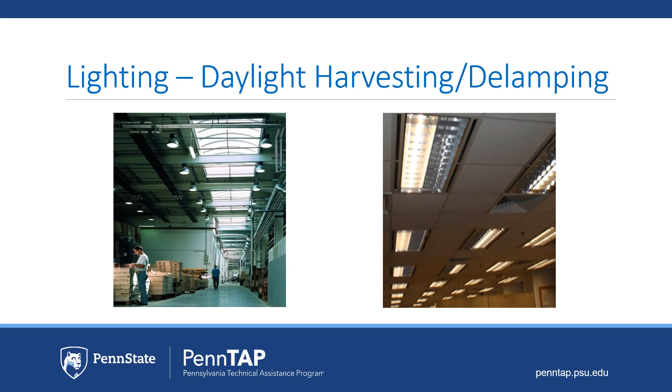While touring your facility to determine where you can delamp, you may also want to note areas where the lights are often left on when no one is in the room. Areas such as these are the perfect places to install occupancy sensors. Occupancy sensors will automatically turn the lights on when someone enters the room and turn them off as they exit.

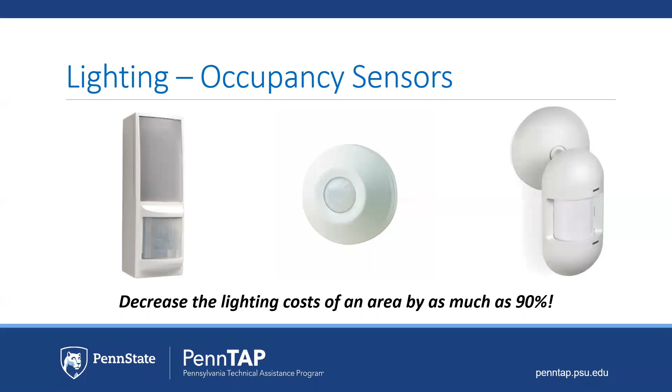And they are most often installed in areas such as your restrooms, your break rooms, storage areas, warehouses, or conference rooms. Once installed, they have been shown to decrease the lighting costs of a space by as much as 90%. Now we're going to discuss upgrading the lighting in your facility to LED bulbs, which can cut your energy bills by as much as 30%.

In addition to this, your maintenance and equipment costs will also decrease because LED bulbs can last up to 50,000 hours. And I want to put this in perspective for you. That means that a bulb that is on 24 hours a day, 365 days a year may last you as long as 5.5 years. That is amazing.

You can upgrade your lighting as a single and complete project or as the bulbs fail. But remember, it will take you much longer to see the savings, up to 5 years longer when you upgrade as the lights blow out. There are grants and rebates available to small manufacturers to help offset the costs of an LED upgrade, and we're going to discuss those later in this presentation. But I want to warn you, in most cases, you must upgrade as a single project to qualify.

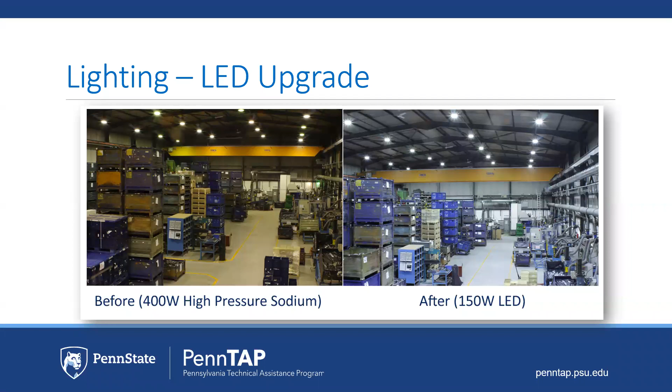And by that, I mean, an area such as shown here, maybe you want to just do that huge production area because that's where all your lights are. It doesn't necessarily need to be every light in your building. It just means that upgrading one bulb at a time as it blows will not qualify you for those rebates or grants.

So Penn TAP recently assisted a client with a lighting upgrade at their plant. While on site, we completed a walkthrough energy assessment where we not only looked at their lighting, but we also looked at their compressed air system and their refrigeration system. We provided the client with a full assessment report that included an analysis of their current systems and the savings based on our recommendations. This plant operates 24 hours per day, 7 days a week. The facility was being illuminated by T8 and T5 fluorescents.

Upgrading these bulbs to LEDs saved the client $7,856 annually in electric costs. The client was also able to use Act 129 rebates from their utility companies to lower the cost of the project by $3,743. And don't worry, we'll discuss those shortly. And here's the kicker. The simple payback period was less than 6 months for this project. In addition, because LED bulbs generate less heat, this client also reduced cooling costs in their chilled storage areas by $531 annually.

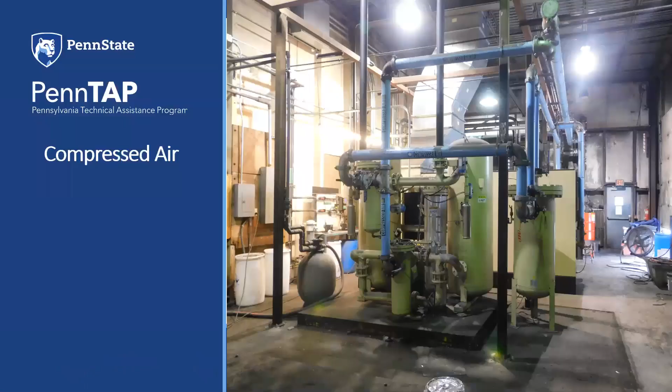Now we're going to discuss compressed air. And compressed air is often one of the most expensive energy-related costs at a facility. Air compressors typically have an overall efficiency of just 10 to 15%, but do not worry. There are several things that can be done to increase the efficiency of your air compressor system. The first thing to do, and I cannot stress this enough, is to stop inappropriately using the compressed air at your site.

Be sure to check idle or abandoned equipment and note if the air supply is shut off when not in use. For example, perhaps you are no longer running a production line due to the impacts of the coronavirus. You may be able to turn the compressed air off for this line until it's back in use.

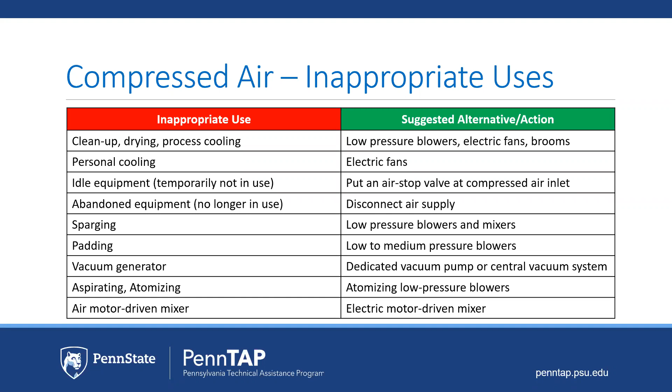Some other tips involve reducing the operating pressure of your compressed air without impacting your production. One way to do this is to reduce your pressure incrementally each week and then let it run for a few days to be sure it is meeting your demand. Or you may be able to reduce your pressure to match the required pressure of your machinery. I want you to remember, it only takes a reduction in pressure of 2 psi to increase the overall efficiency of your system by 1%.

You can also use outside air as intake air to reduce the compressor's workload. This is based on the theory that, in general, the outside air tends to be cooler than the inside air in your compressor room. So in Pennsylvania, the average ambient temperature within a compressor room is approximately 70 degrees Fahrenheit, while the average annual outside temperature is around 50 degrees. The colder outside air is denser and it requires much less energy to compress, which increases the efficiency of the compressor.

Capturing the outside air can be as simple as attaching one end of metal duct piping to an intake port and routing the other end through the wall or ceiling. And it's important to remember, I know today here where I'm sitting, it's about 75 degrees outside right now. Using that outside air can still increase the compressor efficiency, since the outside air is still cooler on a day like today than the air in your compressor room, which can be as high as 120 degrees in the summer.

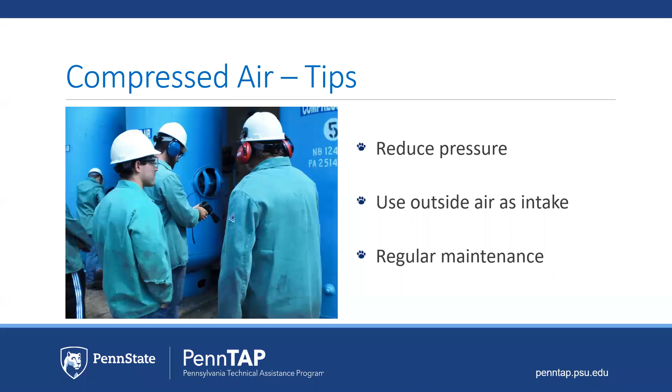Leaks will often occur in areas where the compressed air lines are connected to other lines or equipment, or in areas where there is a lot of movement or vibration. Examples would include the elbow of hard piping, the hose connecting to the hard piping, and the quick connects from the hose to the equipment. And believe it or not, compressed air is also lost where equipment is no longer used, but the air is still being fed to it. This is an especially important consideration during COVID, where you may not be running at full capacity yet.

So how do we detect leaks? This can be done as simply as running your hands along the lines and the equipment to feel for air, or you can purchase a device called an ultrasonic leak detector. They generally range in cost between $300 and $1,200. A leak detector will allow you to quickly find leaks in hard to reach areas or noisy environments. So think of some of those compressed air lines. I've been in facilities where they run along the ceiling. There is no way you're going to be able to feel for a leak with your hand, but that leak detector will let you know where one's present.

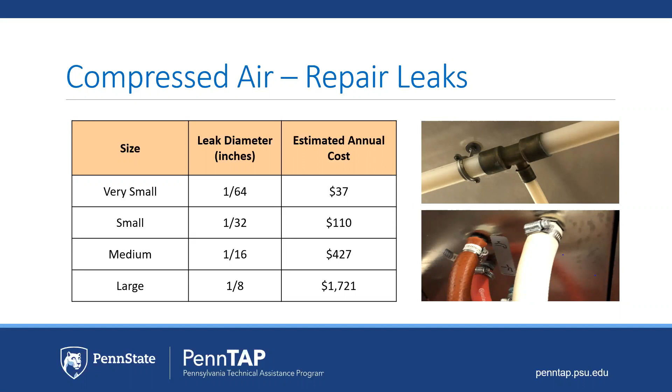Now we're going to look at a case study where we advise the client on fixing those compressed air leaks. We recently visited a food processing plant that was located in central Pennsylvania. They use compressed air to power their production lines. The compressed air is on at this site 18 hours a day, 6 days per week. While on site, we identified 18 leaks within the system.

That was costing them $5,505 total. 11 of those leaks were classified as small. That was costing them $1,208. Now I want you to notice that the 2 large leaks cost this plant almost 3 times as much as the 11 small ones. If this plant had been checking for leaks on a regular basis, they most likely would have been identified and repaired while they were small.

Overall, this plant is expected to save $5,505 annually now that these leaks have been repaired. There are rebates that will help you to lower the cost of the leaks, and we're again going to discuss those shortly.

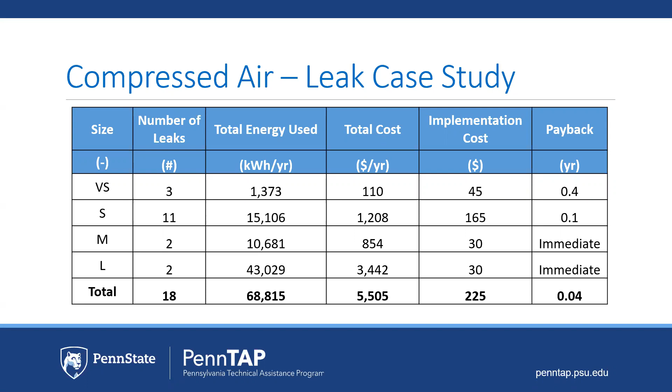Next, we're going to talk about your boilers, and there are several ways to increase your boiler's efficiency, which will decrease your fuel consumption and costs. Once again, the key to boiler efficiency is proper maintenance. Have the boiler serviced and tuned up on an annual basis. Tuning up that boiler can increase the combustion efficiency and decrease your fuel bills by as much as 5%.

Clean the tubes regularly and be sure to check for broken baffles. The tubes in the boiler pictured here became clogged with mineral deposits and caused some of those tubes to break. This may have been avoided with proper maintenance. Consider installing a stack thermometer and monitor the temperature on that stack thermometer daily. If you begin to see the temperatures rising, this is a good indication that your boiler may need to be cleaned or even serviced.

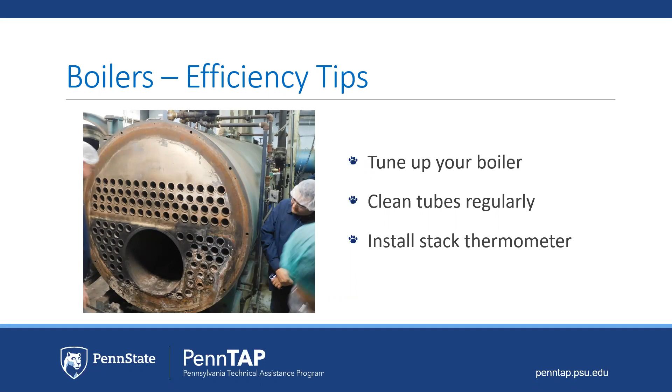Check your flue gas. This can be done by a consultant, a supplier, or yourself with a flue gas analyzer. And Penn TAP is available to conduct a no-cost flue gas analysis for small manufacturers. Checking the flue gas is a simple process. While the boiler is running, insert the probe of the flue gas analyzer into the exhaust stack. Be sure the probe is placed into the middle of the stack and hold it steady until the oxygen and temperature readings stabilize.

Another thing you can do is to reduce the steam pressure. Boilers operate more efficiently at lower pressure. A drop in pressure of 40 psi will increase efficiency by 1%. This can be done in the same manner as reducing the pressure in your compressed air system. Begin by lowering the pressure in increments of 5 psi and allow the boiler to operate for several days each time it is lowered. This will allow you to see if the system is still meeting your operating needs.

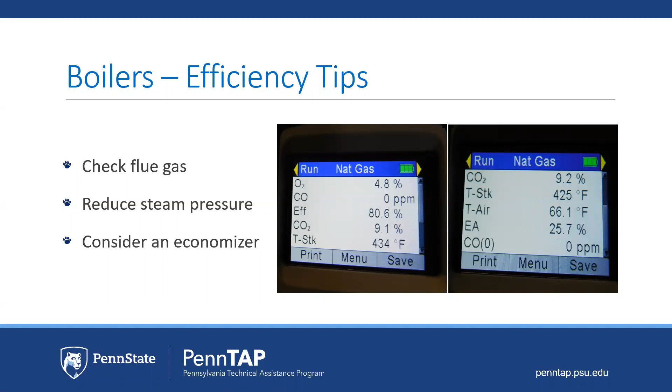Consider installing an economizer to reduce your fuel consumption. Economizers recover heat from the flue gas to preheat the water before it enters the boiler. Without an economizer, this heat is lost. Grants are available to help with the cost of purchasing an economizer, and Penn TAP is also available to assess your boiler to see if this is the right option for you.

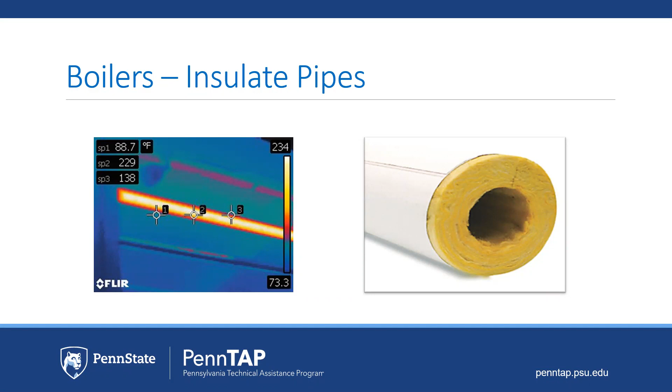There are several types of insulation available, but Penn TAP recommends fiberglass insulation with a jacket, like that shown on the right. It is relatively inexpensive and is easily installed. The jacket will prevent moisture from reaching the insulation in the event of a water leak, and this type of insulation is easily removed for periodic inspections or maintenance.

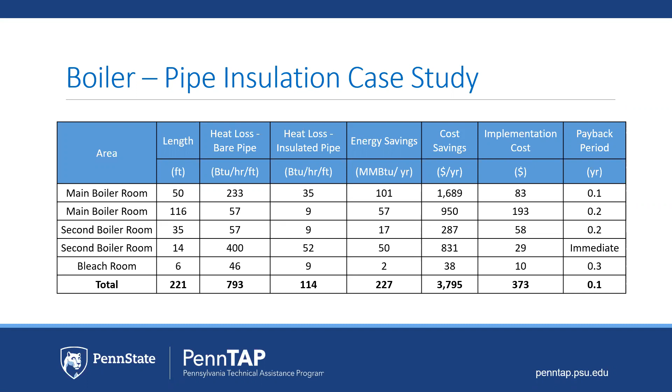Now we're going to discuss your HVAC system. There are several ways to decrease costs associated with your HVAC, and most of which will not cost you a lot of money to implement. The first thing we will discuss, of course, is preventative maintenance. As with your boilers, annual tune-ups are key to running an efficient HVAC system.

Replace the filters every 6 months. Be sure your heating and cooling ducts are properly sealed. And keep units free from debris and periodically check for leaking oil or refrigerants. Any leak such as that is a definite sign that your unit needs to be serviced. It can also be a safety hazard for your employees as well.

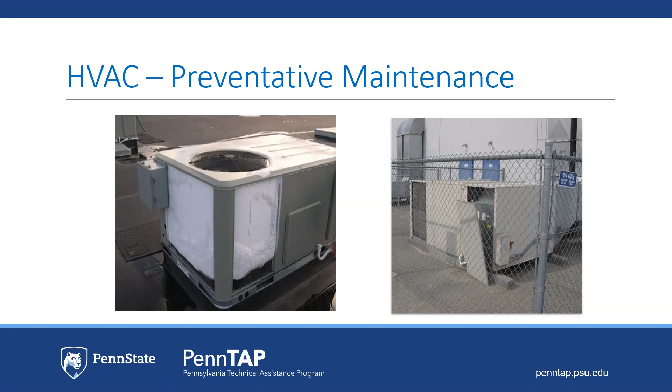The next consideration is installing programmable thermostats throughout your facility. You can save as much as 10% a year on heating and cooling costs by simply turning your thermostat back during unoccupied times. If you do not have programmable thermostats, get them. They will save you money. Do you already have programmable thermostats?

If you do, take a walk through your office area. If you see people using space heaters or personal fans, you might want to check where that thermostat is placed. Is it on the wall where the sun is shining on it, providing a false reading? Or is it below an air vent so that the area never gets quite warm enough?

And by the way, even if you do have them, you should still check for personal space heaters and fans as they use energy. Ask the employees why they are using them. Sometimes it's as simple as switching spaces for the employee that's continually hot with the employee that's continually cold.

You may also want to consider replacing old or oversized units with Energy Star units. Energy Star units use 6% less energy than a standard unit does, and you will save money once you are using an appropriately sized unit. There are grants and rebates available to help offset the cost of such purchase, and we will discuss those shortly.

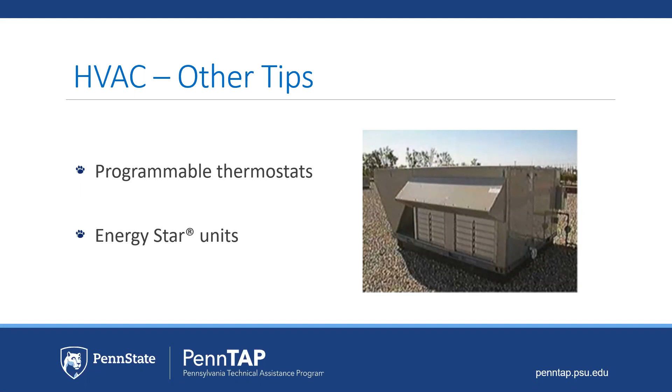Last year, Penn TAP completed an energy audit at a small manufacturer in Latrobe, Pennsylvania. We looked at their compressed air system and HVAC units. The facility was heated and cooled by electric units that were over 35 years old. The air conditioning units were also oversized for their needs.

Penn TAP recommended replacing the AC units with 2 that were appropriately sized for the facility and replacing the electric furnaces with natural gas units that were 96% efficient. We also assisted the client with a Small Business Advantage grant to offset the costs of the project. In total, the client is expected to save $12,291 annually now that the project is complete, with a simple payback period of just over 1 year.

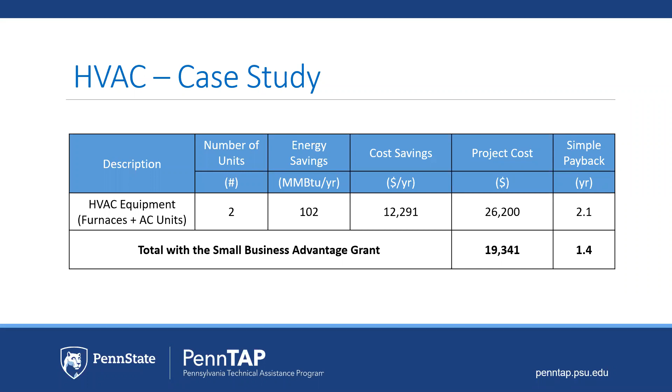Now we're going to discuss your building envelope. And the building envelope is essentially the shell of your building. It is the walls, the roof, and floor, and it includes the windows and doors. There are a myriad of opportunities that exist to improve your building envelope. And today we only have time to discuss a couple of those.

The first thing you should do is inspect the seals around all windows and doors in your building. This is one of the cheapest and easiest fixes to prevent heat loss. And I want you to remember that losing heat in the winter means you are also allowing heat to enter the building in the summer when your AC is on.

You can identify leaks by simply running your hand along a door or a window. Anywhere you can feel air is an area where a seal or weather stripping should be replaced, or the window needs to be recaulked. Likewise, take a look at your exterior doors and garage doors. Can you see daylight shining through them? If you can, it's time to replace the weather stripping or seal.

So let's consider garage doors. Garage doors are a very common source of heat loss. The seals tend to become worn and broken due to all the moving parts in that door. Those worn out seals will allow a significant amount of cold air into the facility in the winter or heat into the facility in the summer because they are present around the entire perimeter of that door.

As shown in the table, one leaking garage door can cost you as much as $223 a year in heating costs alone. Now, can you imagine how quickly those costs add up if you have multiple doors in your facility?

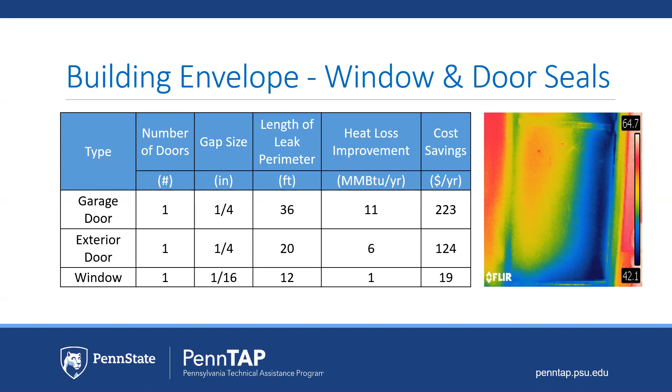And don't forget to check your windows. Recaulk them as necessary and consider hanging draft-proof curtains. They can act just like insulation and prevent heat from escaping.

You should also take a walk around the outside of your building and look for cracks or holes in the exterior walls, such as those shown here. These not only represent a source of heat loss, but can also allow moisture to enter your building. So now you're not only wasting energy and losing money, you have the potential for a mold problem as well. Seal any air gaps or cracks and repair improperly sealed holes or missing seals and caulking.

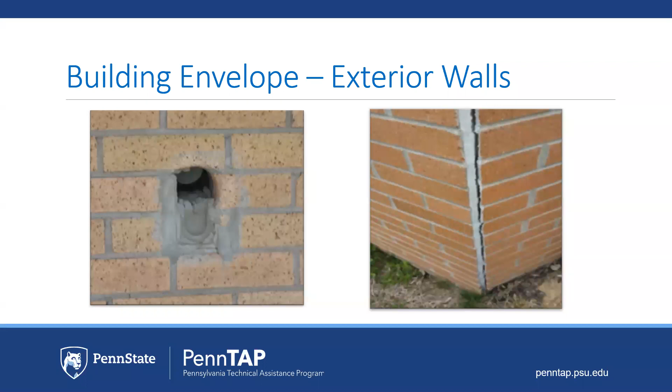As I have mentioned throughout the presentation, there are grants and funding available to help you offset the costs of an energy efficiency project. Today, we will briefly discuss 3 of those programs. We're going to talk about the Act 129 Utility Rebates, the Small Business Advantage Grant, and the Rural Energy for America Program or REAP grant. Detailed information about each of these programs can be found on our website under the Energy and Environment tab.

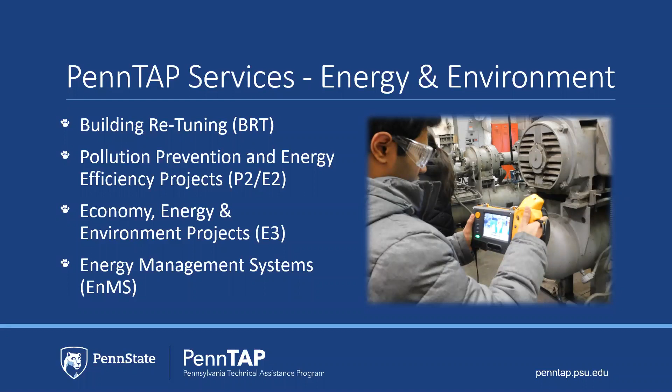We offer opportunities to Penn State students in the College of Engineering to gain real-world experience by having them assist us with energy audits. And again, we go beyond energy as we also work closely with our clients to understand their needs and then match them to additional resources within our university and across the state.

The innovation side of Penn TAP provides technical and entrepreneurial assistance directly to companies. They connect them with the faculty, students, laboratories, and infrastructure of Penn State through the EDA University Center and Engage, as well as to our resource partners throughout the state.

Innovation also brings companies to Penn State's Learning Factory, and I love talking about the Learning Factory. Any company sponsoring a project at the Learning Factory is assigned a team of up to 5 Penn State students from various engineering backgrounds to work on your project. Previous sponsors have included GM, Boeing, Shell, and FedEx, just to name a few.

And past Learning Factory projects have included everything from developing lightweight surgical lead vests to 3D printing for replacing obsolete parts. Innovation also helps student entrepreneurs with the first steps in pitching their business ideas and procuring funding.

In 2019, Penn TAP helped 125 companies in 42 counties throughout Pennsylvania to save a total of $4.5 million. 38 projects were completed at the Learning Factory due to the connections made by Penn TAP, and $30,000 in grants was provided to student startups.